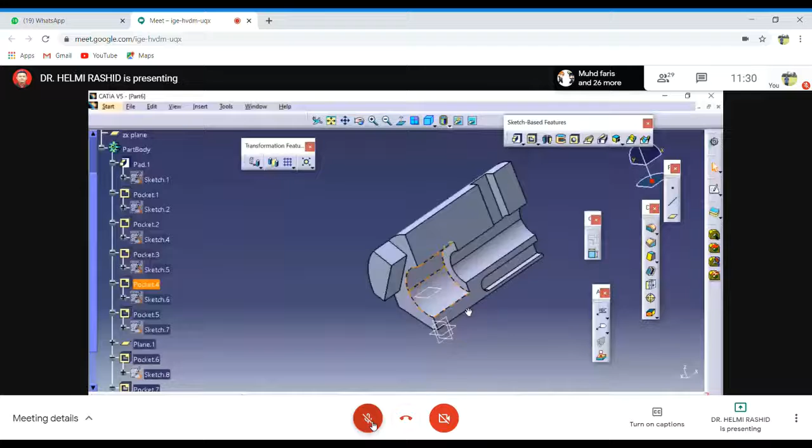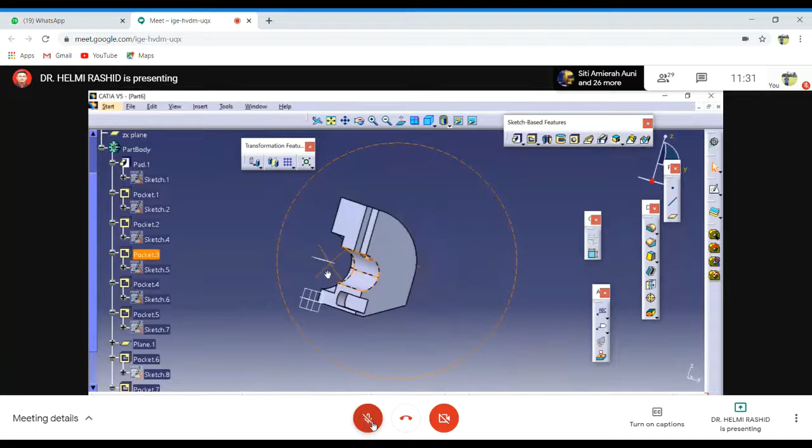So there's something wrong on this part, eh? So you can see this one is not correct, right? So we need to check back the drawing, right? But this is how we do it, okay? So maybe you can do it again, right? So try to do it step by step, okay? Maybe I've missed one or two of the dimensions, maybe it's incorrect. So that's why I get this below profile here not correctly, right?

So some of the dimensions, the bottom part here, right? And then the half part here. So this is where sometimes we need to measure, this one we need to measure from here to here on the paper, and then we translate it according to the scale, right? So this is where it is important.

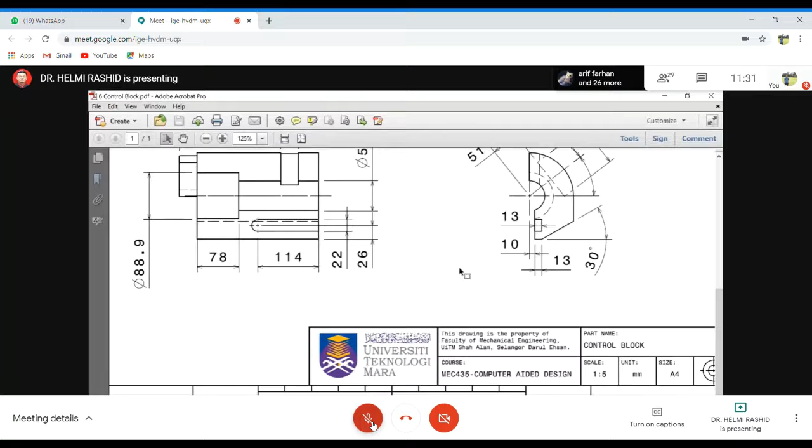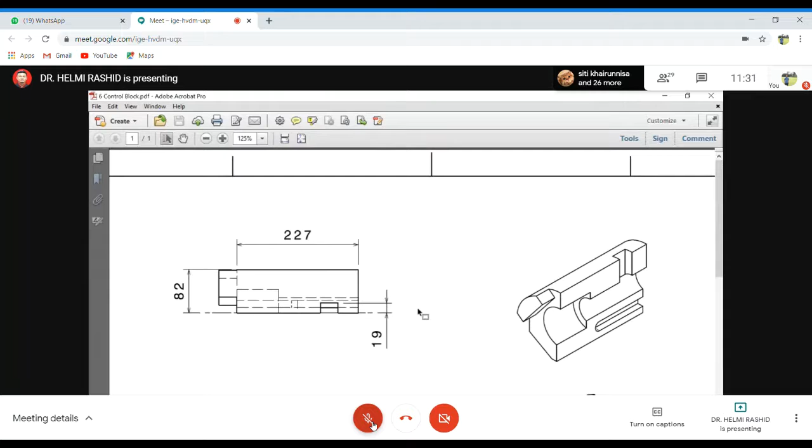So I'll show you how to do the drafting, how to print out a very good drafting, so that when you print your drawing, let's say your scale is 1:1 scale, and this is 78 or 33, right? Or 26, or let's say 40 mm or 100 mm, okay? So if it is 100 mm here and your scale is 1:1, when you take a ruler and measure your dimension on the paper that you have printed your drawing on, you will get exactly 100 mm, all right? Okay, any questions for this?

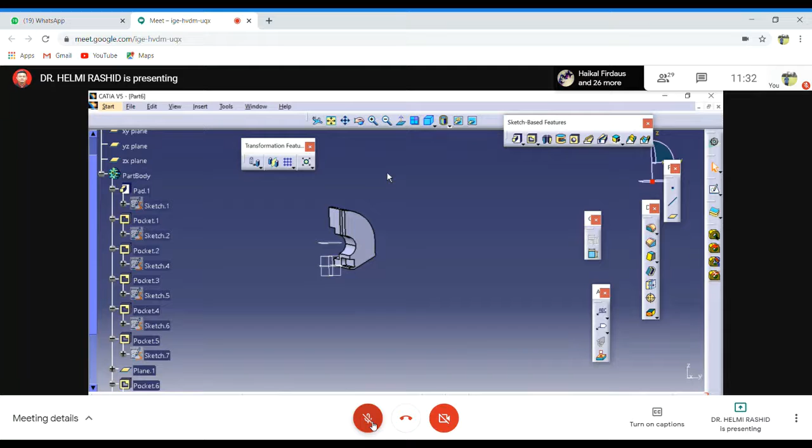So what length did you use for this drawing? 82 plus 82, right? Yes, plus 82. Why do we not use 227 plus 33? Say again? 227 plus 33. Okay. 227 plus 33. Oh, I'm wrong. This one, 227 plus 33, is it? Yes. Because I want to draw this part here, only this part. Oh, okay. I'm adding this because this 33 here is basically only this part. Right? So it's much easier if you just draw this part here, only this part here.

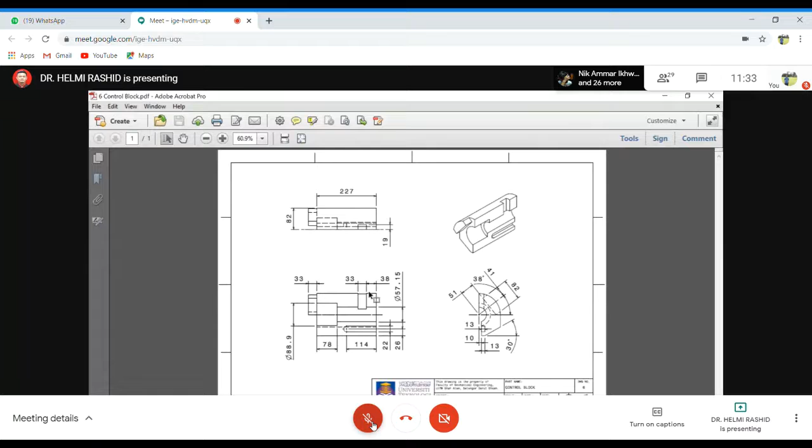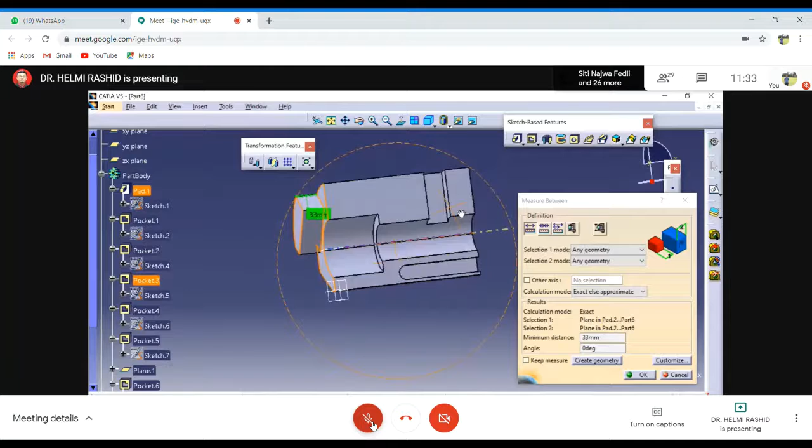Oh, okay. So you can check your dimensions using this tool here, measure between. So this surface and this surface is 227, right? This one and this one is 33, right? So I missed something here, because you can see this hole here is much longer compared to this one. See? You realize this? Yes. So there's something, I'm not sure, the dimensions, so we need to check it back again.

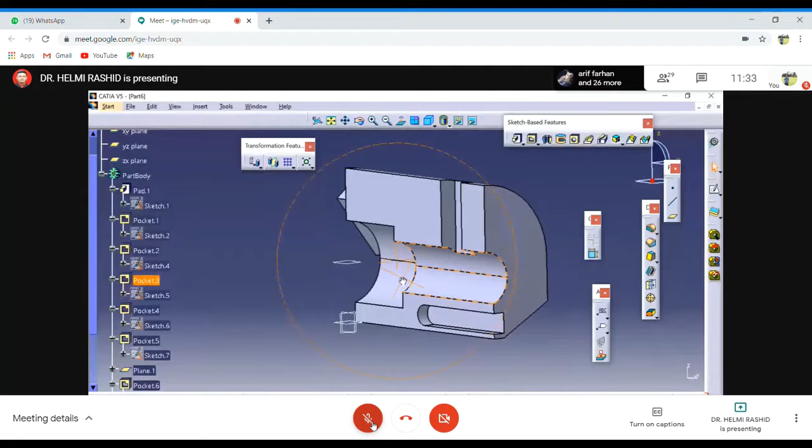But how you do your modeling is basically we start with a very basic part, simple shape. So this is what I'm going to cover in solid modeling. Last week we covered until surface modeling, right? Wireframe and surface. In part modeling, solid modeling, there's a topic we call CSG, constructive solid geometry. So this is where we start to do our part modeling.

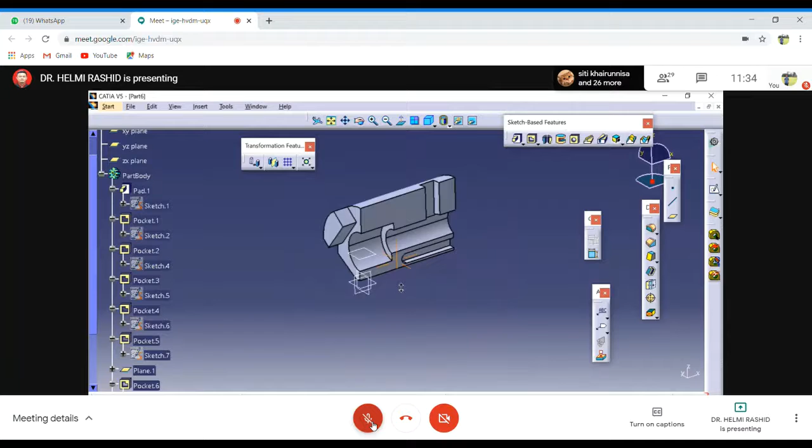In any CAD software, we start by starting from very basic shapes, and then we cut all the basic shapes that are on your drawing, before we go to shapes like this one here, to other complex shapes. Right. Okay, any more questions? Before that, I would like to show you how to use this rectangular pattern.

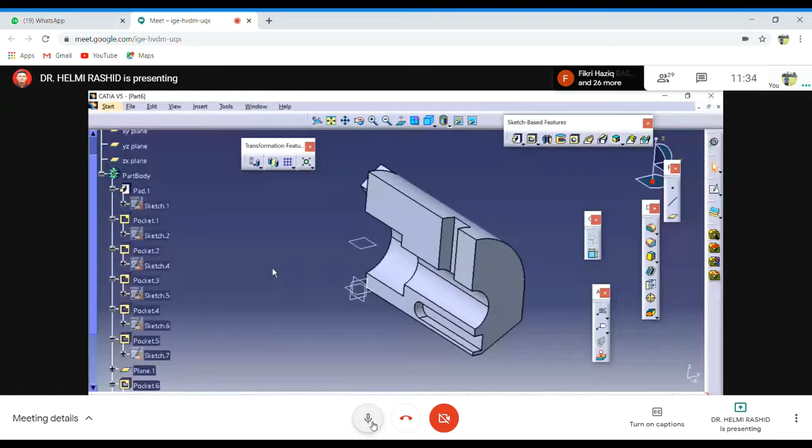So I have a question. Yes. For the hole section, there are two sections, right? Can we just use the hole application on the... Which one? That one that you pointed out? This one? That one and the bigger one. Can we just use the hole? This one and this one? Yes. Okay, use this hole, is it? You can use it, no problem.

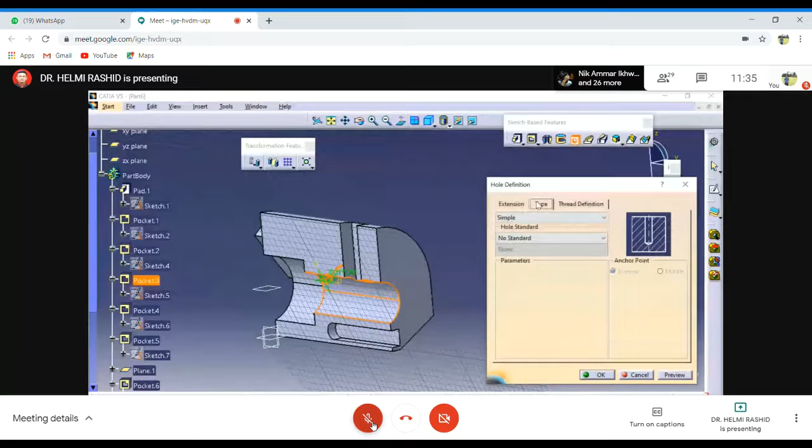Okay, but if you want to use it, because there's no thread in it, we can just use a blind hole. So it's a simple hole, no taper, nothing, right? But for me, it is much easier if you just draw the hole here. If you look at this sketch here, I just draw a very simple circle there, and then I just pocket it.

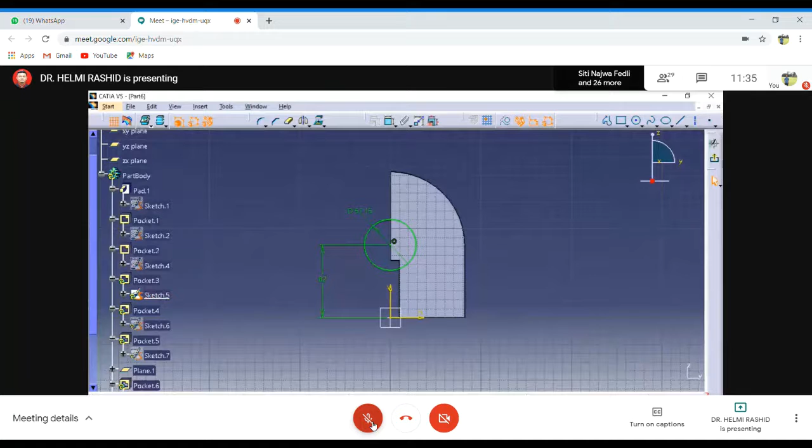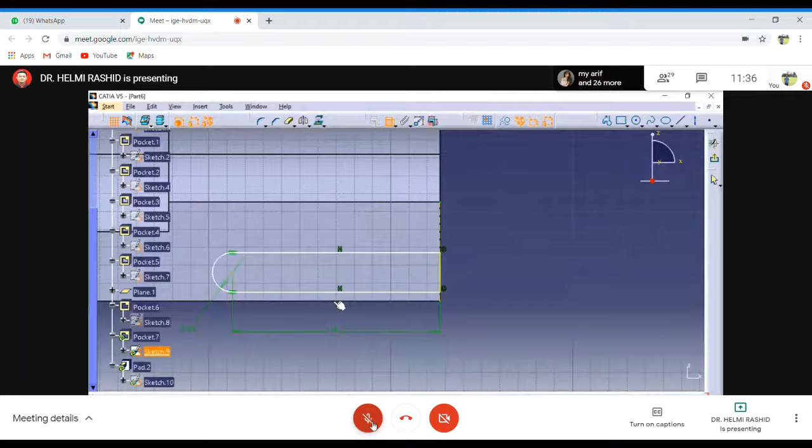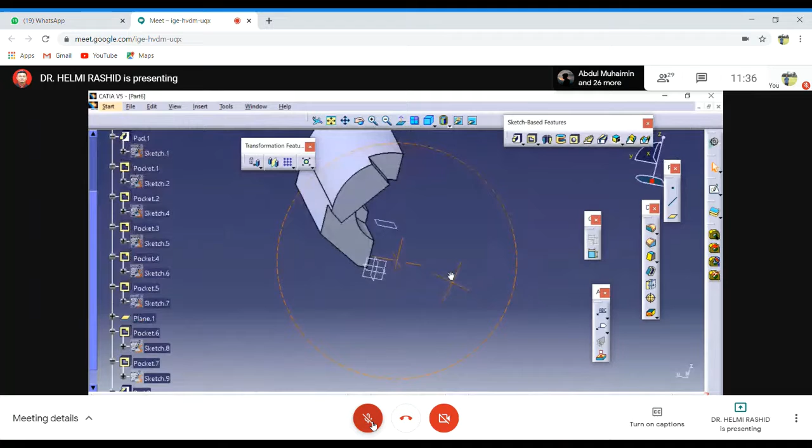So this is your part. Okay, and then I think something is still not right here. This pad here. Okay, looking from the other side. What's the problem here?

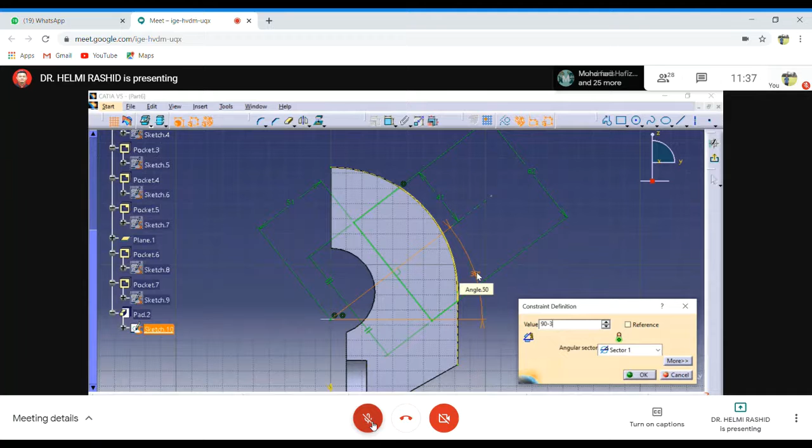It's 38. Is it correct? 38. It's 41. Okay, this part should be somewhere around here. No, something's not right over here. 20 minus 38, is it? No. Right, so there's another dimension that I also missed. Okay, so we need to check it back.

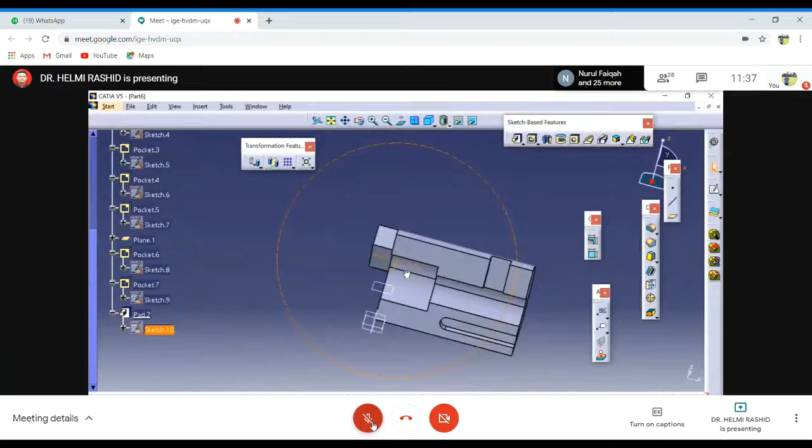Okay, any other questions on these two parts? Right, so again, when you want to start your modeling, start with the basic shapes first. Okay, now I'm going to show you how to use this rectangular and also circular pattern.